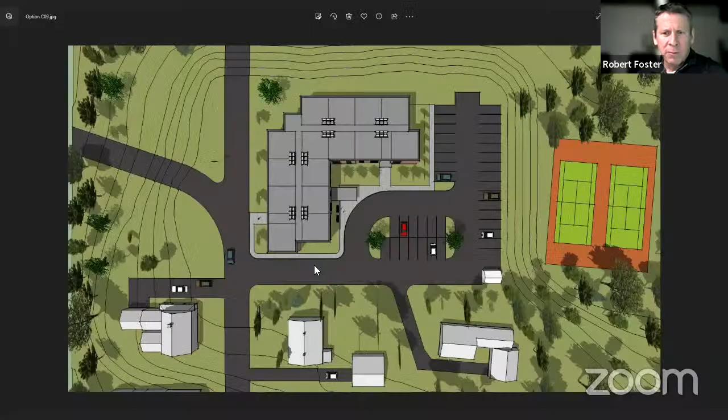Does everybody see that plan? Yeah, we see it, Bob. Okay, I can start the presentation with that image up on the screen, and I can flip through other ones as we go.

Our first task with this project was to determine how we were going to fit this project on the site. As most of you are aware, this site is fairly small—just barely over an acre. The proposed project that the VOA is proposing here will include 36 apartment units and probably an equal number of parking spaces to meet those needs. So it's a fairly ambitious program on a fairly small site.

We needed to make sure you have a site that is completely buildable to do a project of this size on such a small site. The building itself was going to be approximately 32,000 square feet, which is approximately double what the existing school currently is.

After the initial sketches of the site, we determined that the only way we're going to get this project to fit was to go with a 3-story solution. Anything less than that, we wouldn't have had enough space to get all the other site amenities, the parking and other requirements we need. So we took that approach for a 3-story building, which is doable on this site since the height restriction is 42 feet—so we do have enough height allowance to get a 3-story building on the site.

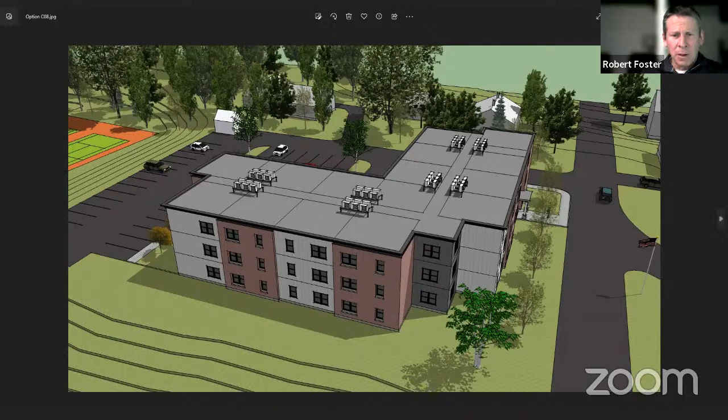Another benefit of going with a flat roof on this building is that we're going to have a fair amount of exterior equipment. Our intent is to go with an all-electrical building, using heat pumps in all of the units, so we'll end up with 48 plus or minus condensing units that we need to place. With a flat roof, we're able to locate those such that from the street level, you're not going to be able to see them.

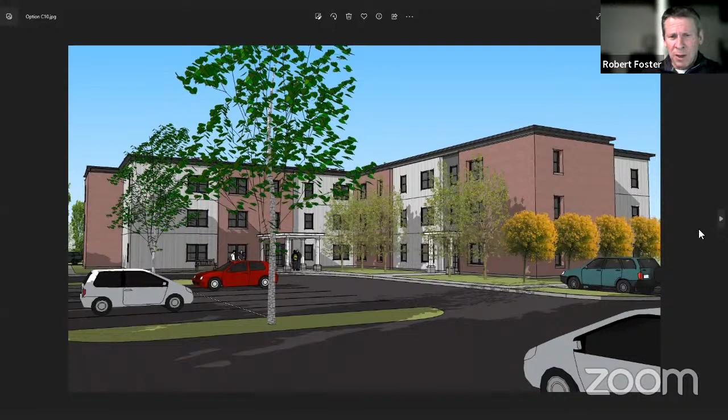We're also potentially working with Maine Housing, whose approach is not only to make the building all electric, but compatible for solar photovoltaic panels on the roof. So it gives us a place to locate those. All of these elements would have been relatively difficult to do if we had gone with a sloped roof on the building.

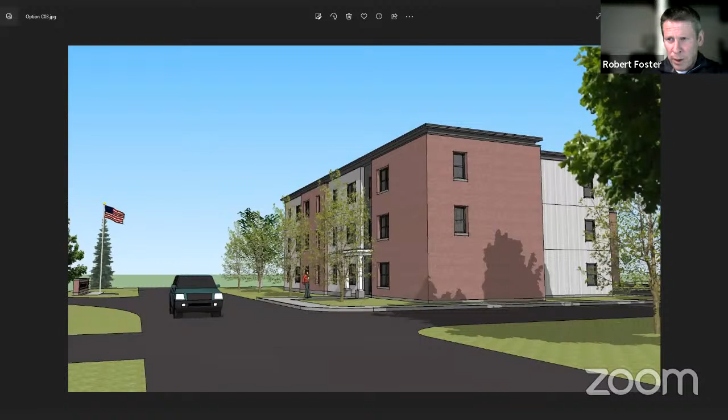These are just some more images of the building. And I can pop up some images of a sloped roof we had looked at, if I can get to it here.

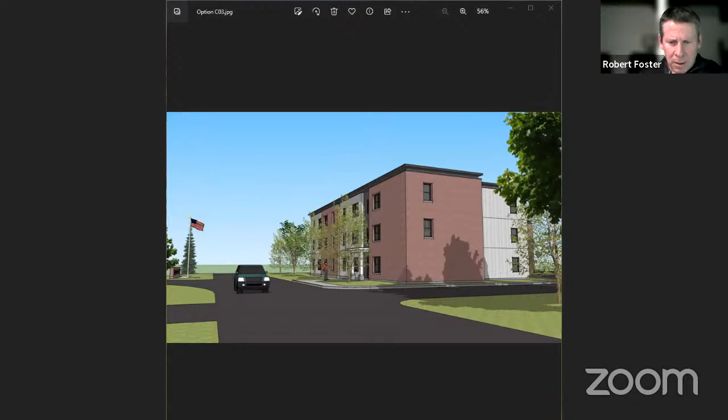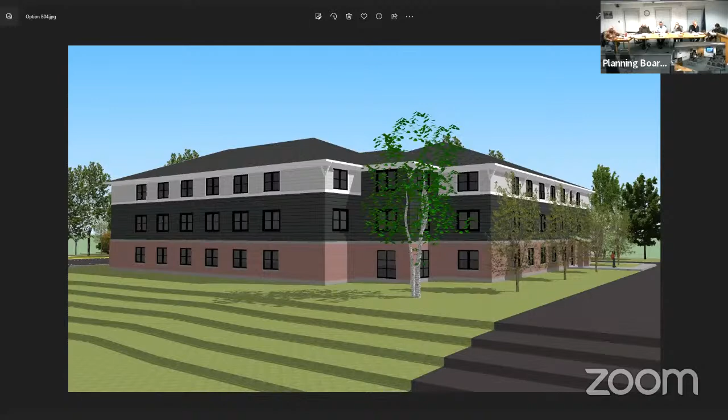Everybody see that image? No—if you can stop sharing the screen for a moment and then reshare, that might work. Okay, let me do that. Can you tell I'm having problems getting this up. Now share it again. Oh, and I see Norm's on now. Yep, yep, I apologize, I had this down for 7 o'clock. No worries. Can you see that image now? Yep. Oh, geez.

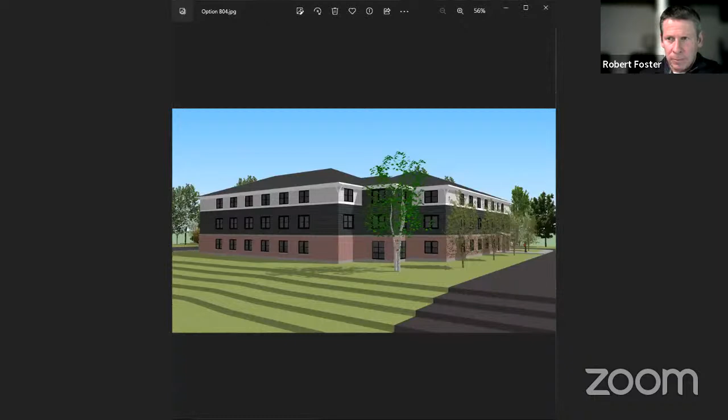Do you all have anything else you want to share about the proposal at this point?

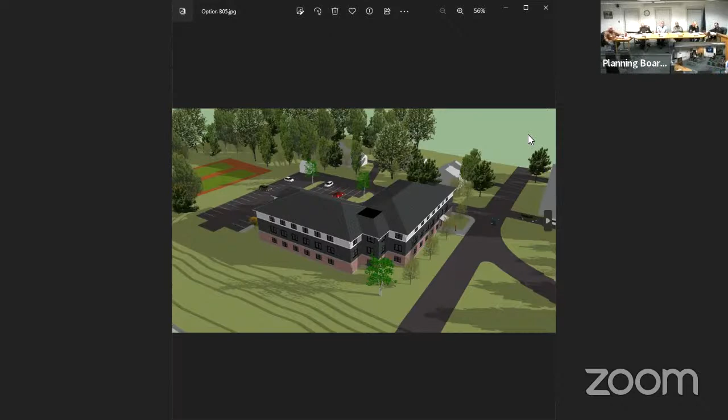One second, I think Bob's still navigating to show you some examples. Here, okay. I don't know if you can see this. I think I'm going to let Norm do his presentation now on the site. I'll figure out a way to get the other images up there at some point.

Norm, if you can give a little introduction, just let everyone know who you are and start on your segment. Sorry, I've got 3 screens here and I was losing stuff. I couldn't find the mute button, unmute button. So, Norm Chamberlain with Walsh Engineering.

So we've been working on this site plan with the team, Bob, Brian and Travis. We've got this laid out with about 30 parking spaces in back here. The footprint is very much the same as the existing building, the area with the basketball courts and the parking lot. It does get pushed down a little closer to the tennis courts. But we think it's all going to work here.

Stormwater-wise, because we're basically mimicking the existing site, we haven't run the numbers yet, but we don't anticipate much of a change in stormwater peak rates of runoff. We're looking to send the water down into this swale beside the tennis courts, so it gets down behind this house that's down here. This is going to end up, there's a stream down there.

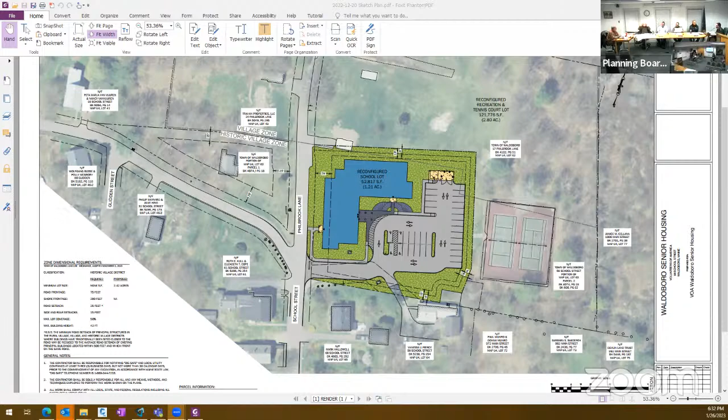And one other question, the A.D. Gray building has interior drains. Did that originally also head to that stream you're talking about using now for the stormwater? We're not sure. There's a trench that goes across the parking lot heading towards the tennis court, and we don't know what that is. The survey didn't pick up any drainage pipes, so we may find something when we get into demolition, but I think Bob said there's a flat roof with roof drains, and we're not really sure where they go. But everything ends up going down this way towards the stream.

So what we would be doing is collecting all our stormwater, roof and parking lot, and bringing it down into a level spreader in this area here. That area next to the tennis court is about 3 or 4 feet lower than the tennis court, and it ends up going around into that stream.

So that's where the majority of the water goes today, and we would just be mimicking that. And if I can jump in, I'm about 75% sure the stormwater actually cuts through the tennis courts, and that's why there's that massive pipe going right through it. That's what John Daigle told me.

I got a question for you, just concerning the demolition. I took a ride past the high school the other day, and it's very classy. I love that old building, and it had a beautiful sign, Waldoboro High School. Is there any plan to take anything from there or repurpose any of the materials after it's razed?